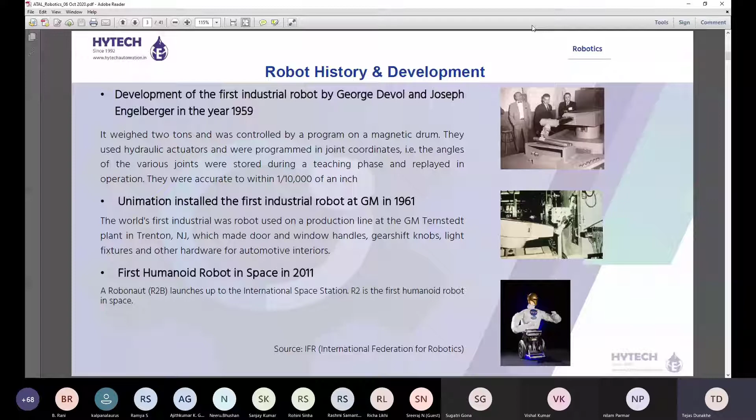In 1961, the first robot was installed in General Motors, and in 2011, the first humanoid robot actually went into space from NASA. So the industry is moving very fast, and in this next slide, I'm going to explain why robotics is important nowadays, why everyone is talking about this.

So there is a big concept, especially in the educational industry or even in the human resource industry, that robots are going to cut down the jobs of our people. India being a highly populous country, robots are something that we cannot afford because eventually people will lose jobs. So that has not been the case. If you see the statistics of China or US or any developing country for that matter,

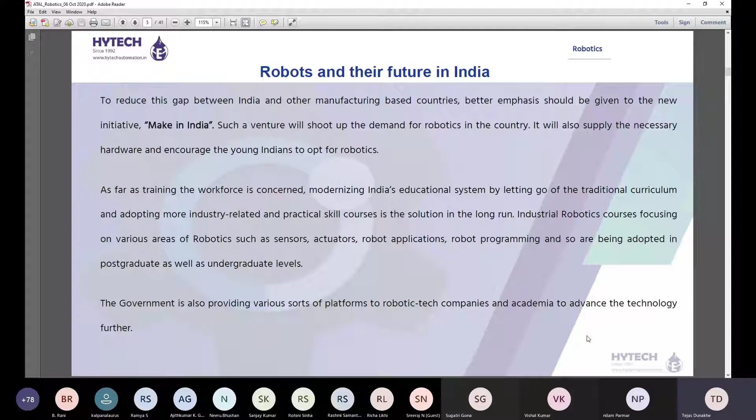We have a concept that a robot means a very big six-axis robot standing on a pedestal which can carry 400, 500 kg. It is not like that. Even for human movement, whatever we use, it can be termed as a robot. So moving on to the next subject that I want to cover is robot kinematics. What exactly is kinematics and why is it important? Kinematics is the study of the relationship between a robot's joint coordinates and its spatial layout.

Excuse me. Sir, you have told that for every 10,000 we have 3 robots. That means you are talking about the current situation of India? So this is the present situation, that this much robotics we are using in India. Yes. For every 10,000 employees, we are having 3 robots. Okay. Thank you, sir.

Yeah. So I'll share this presentation as well; the entire data is available there. The reason that we have so few robots is because the manpower is very high. The number of people working in India is much higher as compared to the UK or US. That's the reason this ratio has gone down substantially. Even China is not the best. China is, I guess, number 10 or number 13 right now. So that ratio has a lot to do with the population of the country as well. So moving into kinematics. Kinematics can yield very accurate...

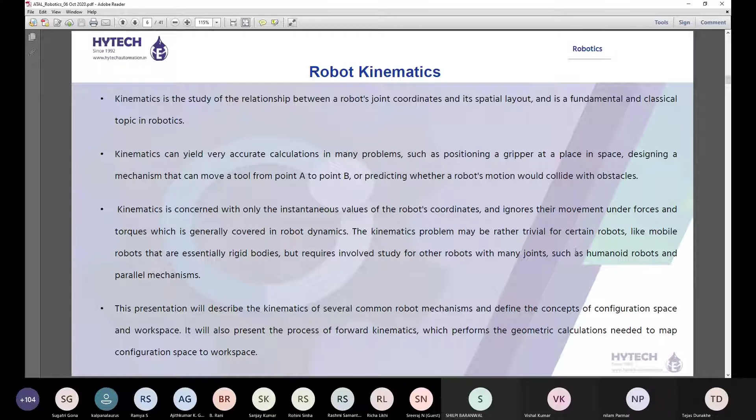Okay, I'll move ahead. So kinematics is the analytical study of the geometry of motion of a mechanism. Mechanism in the sense it is a robot; it can be any mechanism. So the analytical study of the geometry of the motion of that particular mechanism. This is with respect to a fixed reference coordinate system. So we have a fixed reference coordinate system, and with that we are going to analyze everything.

And again, as I mentioned, without regard to the forces or moments that cause the motion. So if it is driven by an electrical motor moving at some higher speed, the inertia, or m r omega squared as we call it, is not considered in kinematics. In order to control and program a robot, we must have knowledge of its spatial arrangement, where it is kept, how far the other objects are, where it has to reach, at what point it has to pick up the load. That means I define a robot with its payload capacity.

I say my robot has a 12 kg payload. That means it is able to lift 12 kg. But over its entire range of motion, it is not capable of lifting 12 kg. So depending on the spatial coordinates, the geometry, the kinematics, its payload capacity will keep on changing. That is where the study of kinematics comes into the picture. This sounds a little trivial, but every robot comes with software which will tell you at what point the payload capacity is, what your speed would be, and what your acceleration should be.

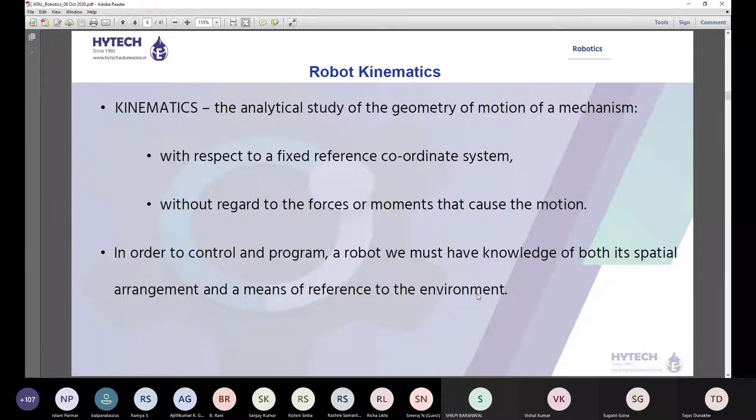So this is an open chain manipulator. Open chain in the sense... Sir, payload capacity is how much weight the robot can take. So the payload capacity of the robot depends upon the links and the joints. They are totally dependent, and it affects the speed also. If the robot has to handle heavy loads, then the speed will be low.

Yeah, generally, ma'am, this works in the reverse way. Robot manufacturers decide the speed of the robot, and they expect the user to operate at that speed. Once the speed is fixed, they'll calculate the total payload capacity. That means if my maximum speed is, say, 10 meters per second, then my entire robot will be designed with that particular speed in mind. So this is kind of a factor of safety. You are not going to run the robot at 10 meters per second all the time. You might run it at 5, but my design is based on that speed at that capacity. Yes, it's the maximum speed written. Yes, correct.

So this is the base. The mechanics of a manipulator can be represented as a kinematic chain of rigid bodies connected by revolute or prismatic joints. I guess you have gone through the different types of joints. Revolute is one which revolves. The second one is prismatic, which moves in a linear direction. At the end of the presentation I have explained how exactly this works when we go into the drives. In an open chain, one end of the chain is constrained to a base, while on the other end the end effector is mounted.

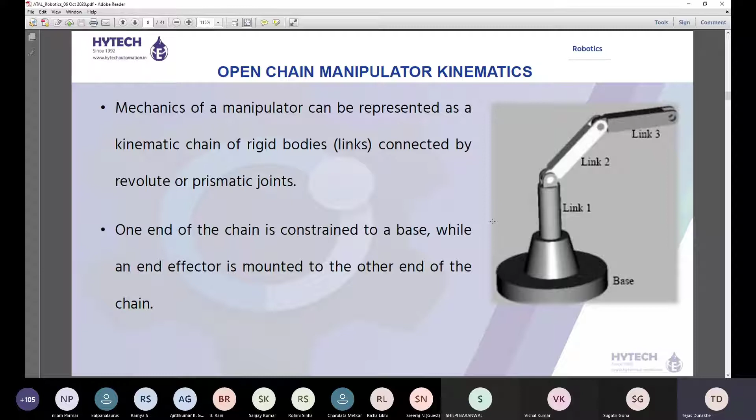Sir, excuse me, what is closed kinematic? I haven't got that. That means the other end of the chain is also fixed. If I move my J1, that is joint 1 of this closed chain, the end of the chain will not move freely because it is fixed to a particular position. If you see this, the end of my link 3 is free. So as I move my link 1, my link 3 will move very freely. Here in this case, it is not possible. Once I move my link 1, link 2 will manage in such a way that link 3 is fixed.

So in the closed figure, can you please go to the next slide? So in this figure, next slide, please. Yeah, this previous one. Okay. Sir, please next slide.

Excuse me, sir. Can we have the question session later? Because it breaks our concentration. Please continue the content delivery, and we can have the question answer session later. It's very difficult for us to focus again and again. Yeah. What I'll do is, ma'am, after 2:30 we'll keep the question answer session and we'll go back to any slide. Too many questions, and it's breaking our concentration. Ma'am, we can make a note of the slide number and come back after 2:30 and answer all the questions. We are not able to concentrate, sir.

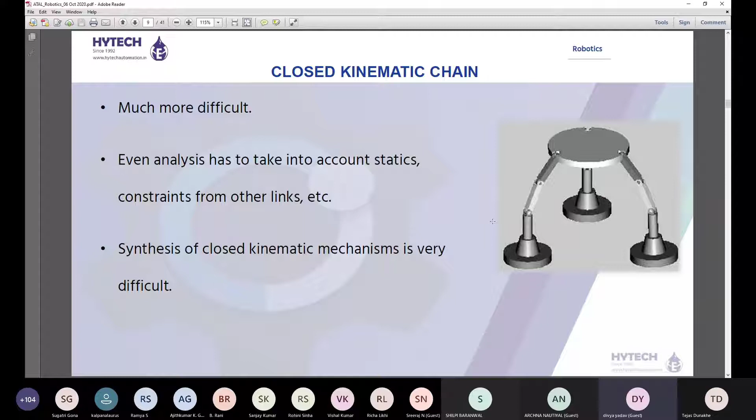So I'll move ahead. Here, if you see the basic concept of kinematics, if I move my joint 1, my end effector is going to move. At the same time, when you have 6 joints, movement of each joint is going to affect the position of my end effector. So in differential kinematics, the speed of the movement of the joints is going to affect my end effector. This speed, especially in robotics programming, matters a lot. If you want to achieve a particular position at a particular accuracy, differential kinematics plays a very important role.

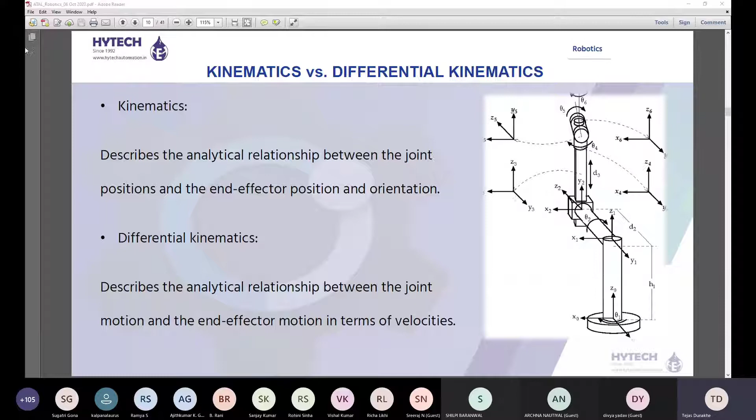I'm not going into the details of how to calculate everything, but this speed for every joint is different because in an articulated robot, my base axis will have the maximum capacity motor. That is my strongest axis. My J6 is going to be my weakest axis. If you see the construction, I'll show you a video, you'll immediately understand there is not enough space; there are a lot of constraints by which a manufacturer cannot put a high capacity motor there. So depending on my motor capacity and the reach of the robot, the speed of each joint is defined. I'll show you a selection criteria later in the presentation where you'll understand how to calculate that.

So when we say kinematics, that all depends on my frames. So robot is working in three-dimensional space. There is no fixed coordinate system. That means whenever I buy a robot, I get a robot with a CG, center of gravity.

There are different types of coordinate system. One is the world coordinate system. That means if you want to, you can define your workspace, say 3 meters by 3 meters. Depending on that, you can define your WCF. RCF, robot coordinate system, comes with robot. That is where the CG of the robot lies.

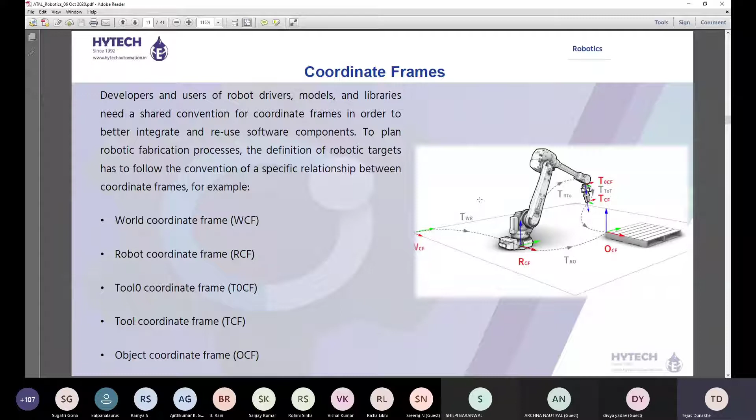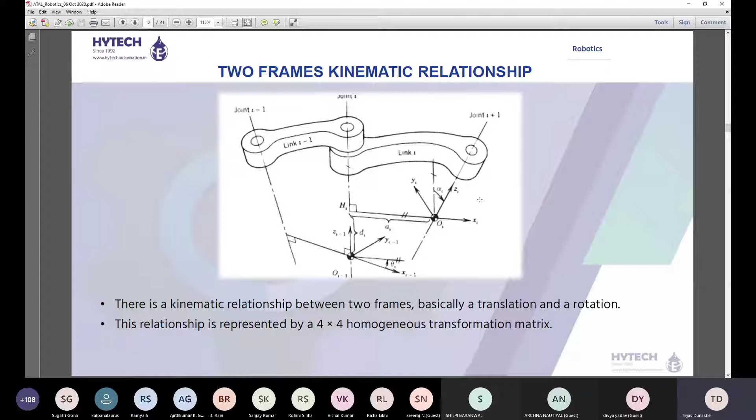Any coordinate frames, that means all these coordinate frames are related to each other because they are going to move in the same way. Only thing, my reference point is going to change. So with kinematics, you can relate each frame to another. There is again a calculation with the 4x4 matrix. You can carry out the entire calculation to find out the coordinates.

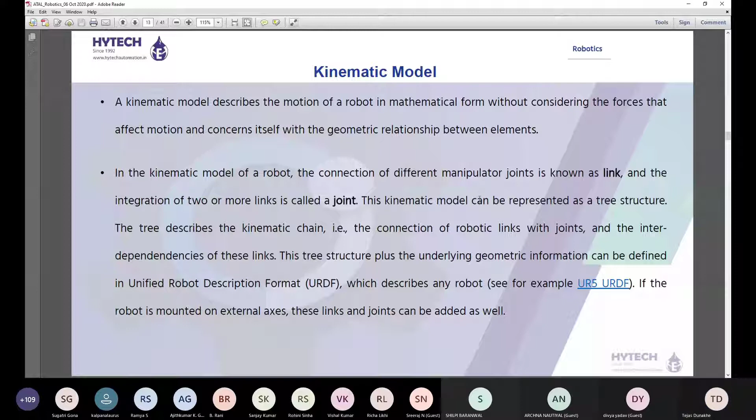So we move into the kinematic model. So a kinematic model describes the motion of a robot in mathematical form without considering the forces, external forces. In the kinematic model of a robot, the connection of different manipulator joints is known as link. And where 2 or more links connect, it is called as a joint. This kinematic model can be represented as a tree structure. The tree is nothing but a kinematic chain. So I'll move into that.

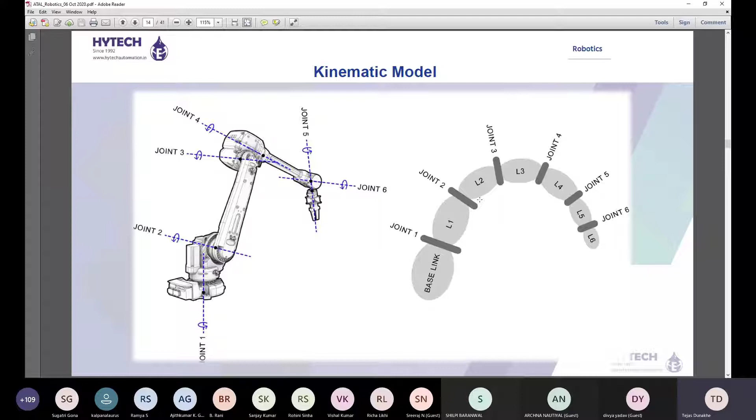You take any manufacturer, this is going to be the most commonly used robot. If you have a specific application, you can manufacture anything you want. But generally in the industry, any of the automobile companies, you will find this kind of a robot there. For welding, for handling, for pick and place, most of the robots are like this only.

So robot links. Robot links are solid mechanical elements. Depending on the kinematic model, movement of certain input links allows the output links to move at various positions.

Robot joints. The joints are the elements in the robot which help the links to travel in different kinds of movements. So there are 3 types of joints which you have already been through. The revolute, which rotates, the prismatic, a sliding joint, then fixed. Generally, the base of a robot is fixed. So that is a fixed joint.

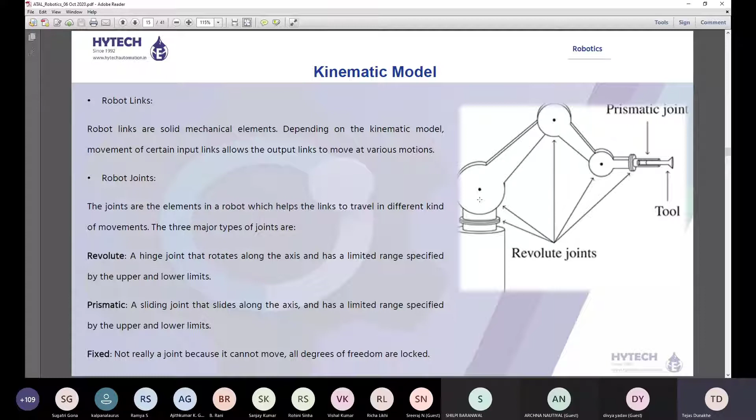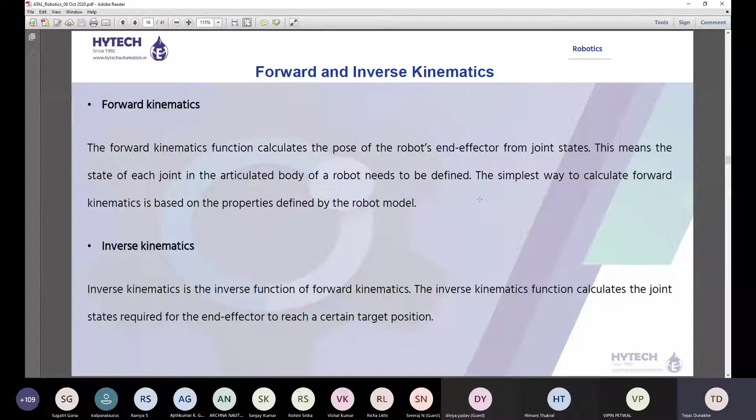So the inverse kinematics is the inverse function of forward kinematics. The inverse kinematics function calculates the joint states required for the end effector to achieve a particular position. We go in the reverse direction. Yes. Sure, to give you an idea, in forward kinematics, you move J1, J2, J3, and calculate where your end effector will reach. In inverse kinematics, you have to move from A to B. So how are we going to move all your 6 axes? We are focusing mainly on the articulated robot with all 6 joints.

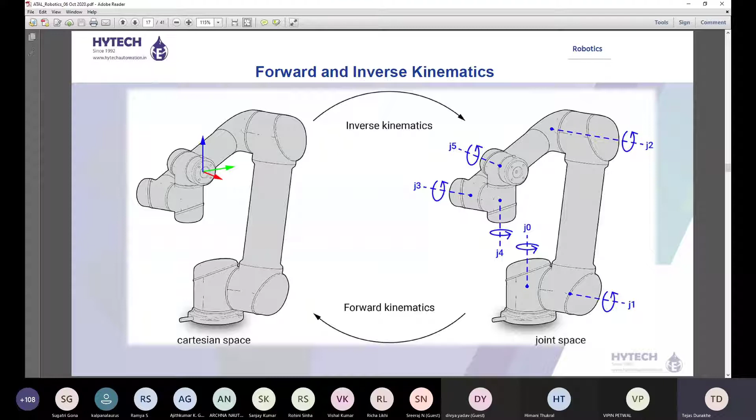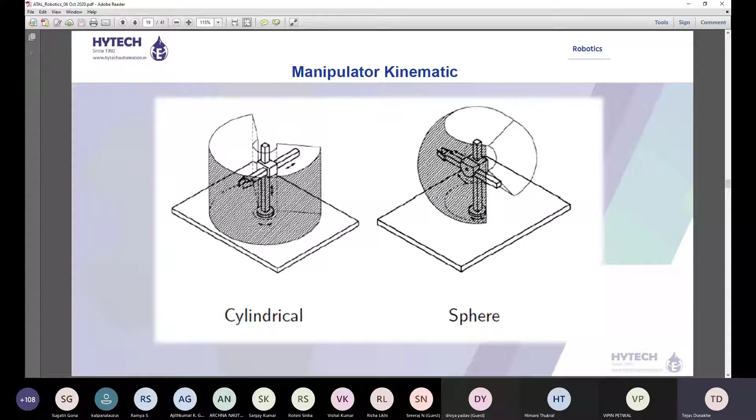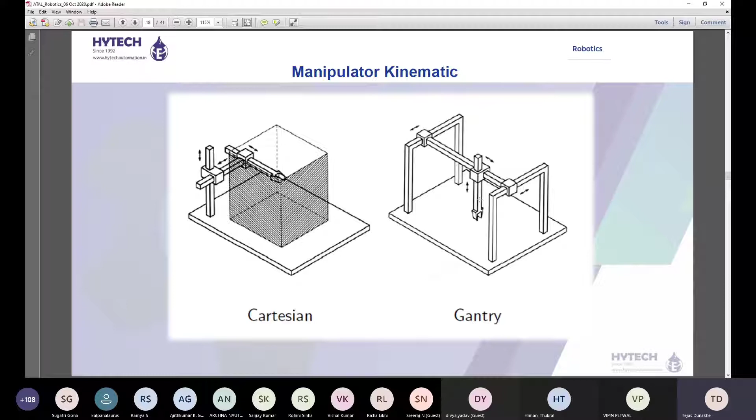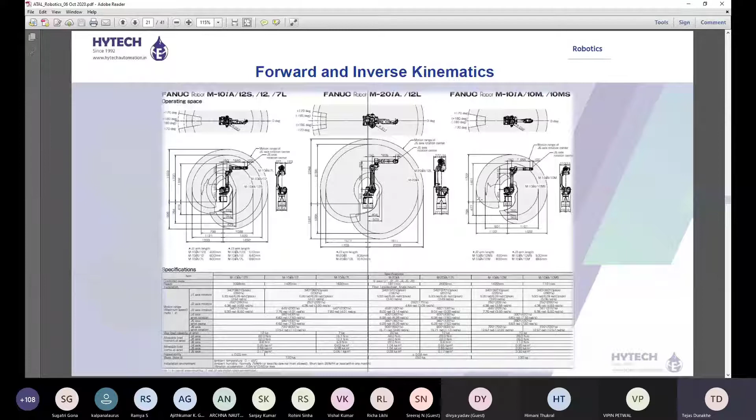So depending on your requirement, there are a lot of softwares through which, if you have to pick up a job from 1000 mm, which is 1000 millimeters away, you can put all these conditions in a software and it will tell you which robot to select. So this is how any industrial robot selection looks like. They give you the reach, they give you the payload, and then with the kinematics, you have to find out what kind of robot you want.

So this is an articulated robot, most commonly used. I guess I had an earlier question that in an articulated robot there can be a prismatic movement as well. There can be, but this is what you will mostly see in industry. The red colored motors which you see are the servo motors, which are connected for each and every joint. When you have a motor, generally 90% of the times it is a rotary motion.

Here the end position is achieved by moving J1, J2, J3, J4, J5, J6 in a rotary movement. So this is what is used in most of the industries, paint shop, spray shop, anywhere. This is the most commonly used robot.

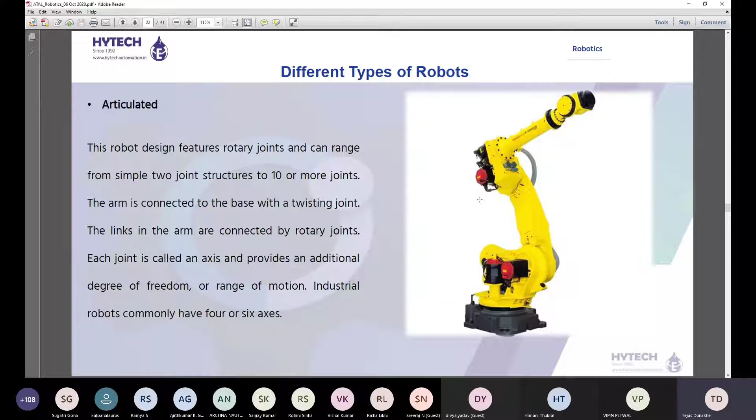This is a Cartesian robot. This is generally manufactured depending on a specific requirement. That means there is no mass production of this. If I have a factory, if I have a particular application for which I need to design something, then yes, this can be done. But if my articulated robot volume is 99%, Cartesian robot would be 0.1%. That is the density of these robots.

Then this is a cylindrical robot. A cylindrical robot is nothing but a Cartesian robot with base as a rotary axis. So it can cover 360 degrees, a Cartesian robot which can cover 360 degrees motion. A polar robot which generally has one or two axes with a rotary motion. Again, very, very rarely used.

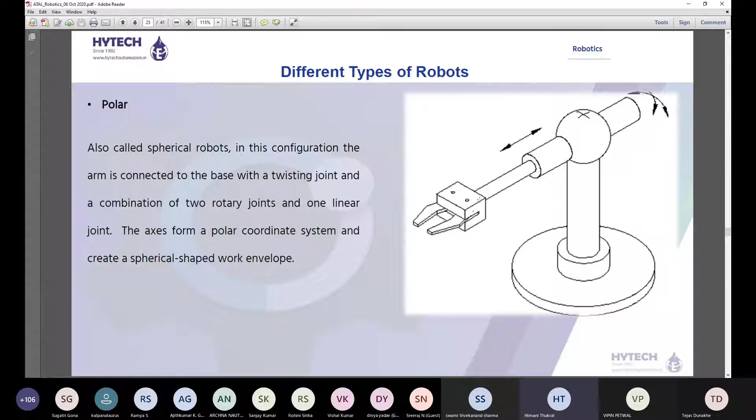Excuse me, sir. Yeah. Sir, I'm not able to see anything on the screen. Is it my problem? Right now I'm able to see. Yes, sir. Thank you. Sir, can you please show that Cartesian robot once again? Yeah, thank you. So I'm going to show you the video as well.

Since we are going back to this slide, I'll tell you, in this Cartesian robot there is no interpolated movement most of the times. That means it has got mostly 3 or 4 axes and one axis will move at a time. This is generally programmed like x-axis 10 mm, y-axis 5 mm, z-axis 15 mm. So it will keep on following this routine. Whereas in an articulated robot, you have point A to point B, where all 6 axes will move at a time. I'll show you a video of this. It will give you a very clear picture.

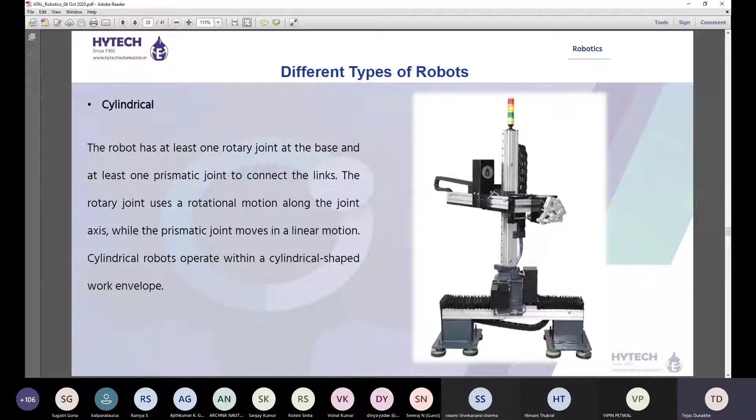This is one of the latest robots. We had used this. The speed of this is unreal. It can work almost 20 times faster than any articulated robot. This is for IC or most of the packaging industries where you have to fill up anything that you see packaged. Most of the times in developed countries, this is the robot that they are using.

The speed of application is almost 30 meters per second. At a very, very high speed, it can work. Again, a very, very expensive robot, hardly being used in India, but in the US or in Japan, this is most commonly used. This is not a type of robot.

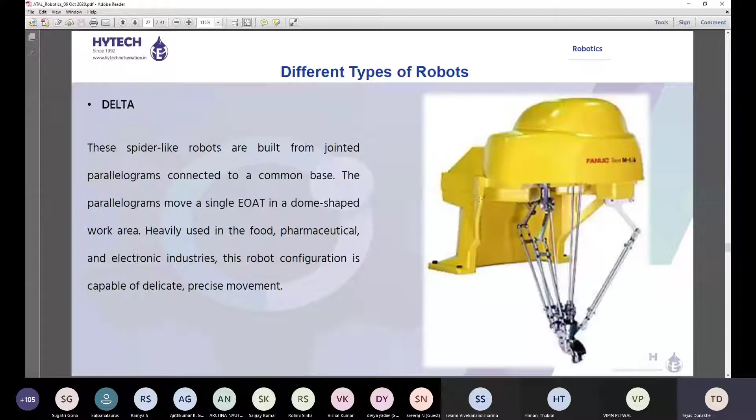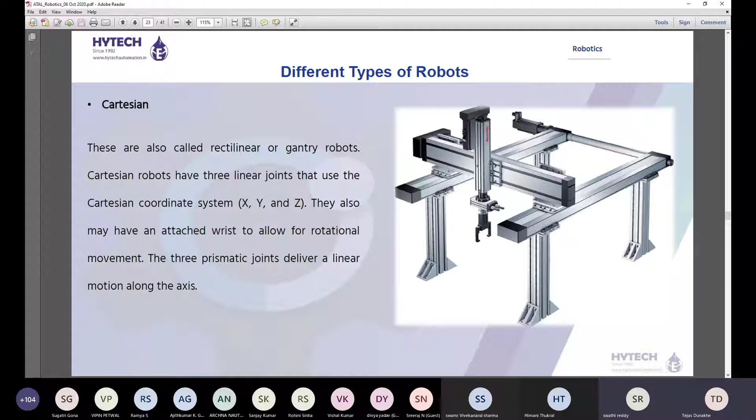Excuse me, sir. Sorry to disturb you. In Cartesian, can you just give me an example of what use it is? Everything else you have given examples, but where exactly are we using Cartesian? What type of work do we do with it? Ma'am, I'll show you a video of that. Just allow me 2 to 3 minutes. I'm going to show you a video of a Cartesian robot. All right, thank you.

So this is not a type of robot, first of all. Collaborative robots are now coming into the picture big time. There is one company from Denmark, and they have very nicely developed this robot. These robots are again articulated robots, but they work in collaboration with humans. That means the speed of this robot is very less and their moment of inertia is very less. If the robot just collides with a human, there is not going to be any injury to the human. So that is the advantage of this.

A lot of industries in India are preferring this robot because their efficiency is less, their speed is less, but yes, their cost is also less. So this is where industry is moving in a very fast way. Most of the articulated robots are now also coming up as collaborative robots. Generally any articulated robot will weigh somewhere around 140 to 150 kg. It moves at 20 meters per second. If it collides with you, it is going to cause a lot of damage, very serious injuries to human beings.

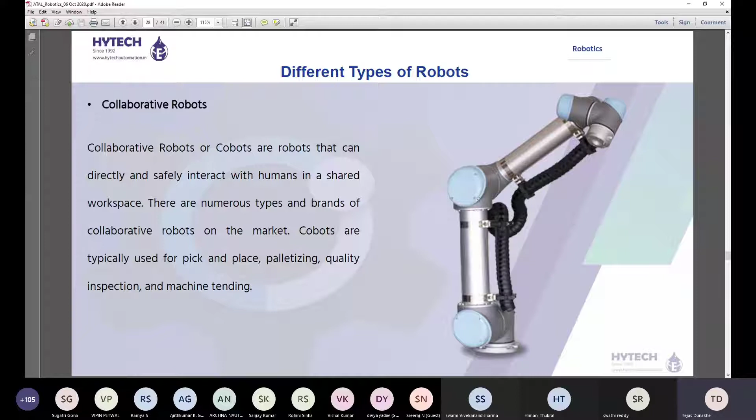This robot is exactly the reverse. It has got sensors, torque sensors, overload sensors. As soon as it comes in touch with humans, it will stop immediately. So a collaborative robot can be anything. It can be SCARA, it can be Cartesian, it can be articulated. This is just a type of robot, not a structure of a robot. So what I'll do is I'll show you a few videos which will give you a very clear idea.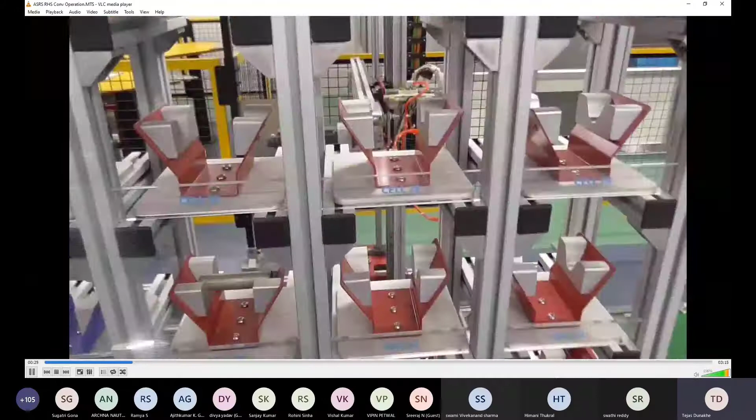What you see is actually a specifically designed Cartesian robot. It is used for pick and place application. Looks-wise it can be different, but it has got three axes, X, Y, and Z. You have to program them in a way that it will just obey your instructions. This is particularly used for pick and place. This is an automatic storage and retrieval application. That means the job will be kept onto something, picked up by a robot, manufactured, and it will again come back to this unit.

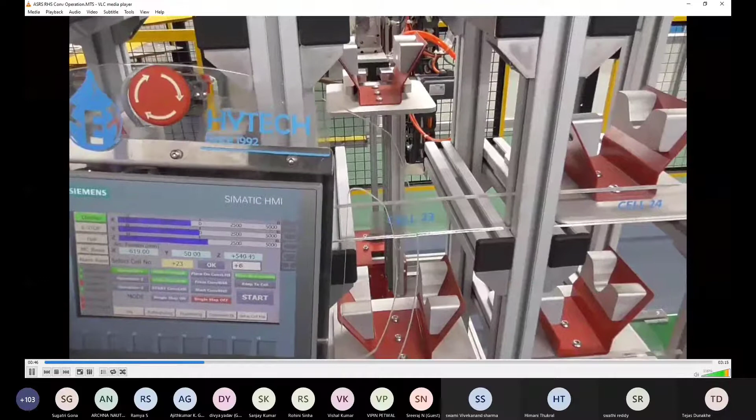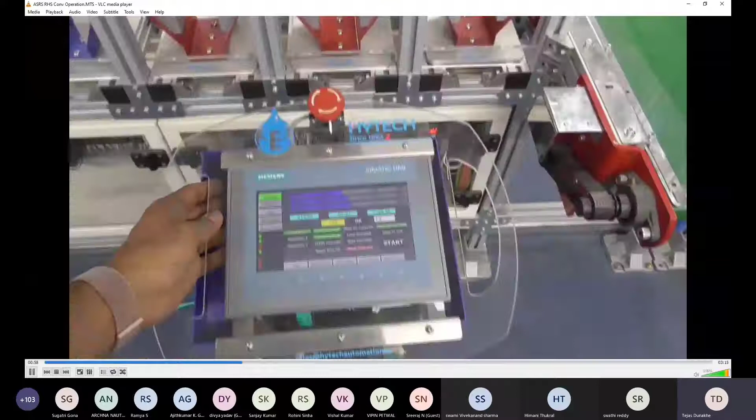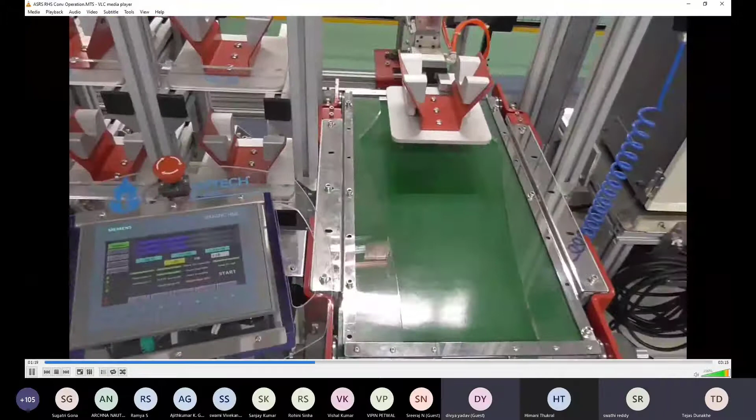You can see the axes moving, the X, Y, Z coordinates are moving. No, sir, I can't see the video. Can anyone see the video? Is that visible? Yes, sir, it's very clear. It is visible.

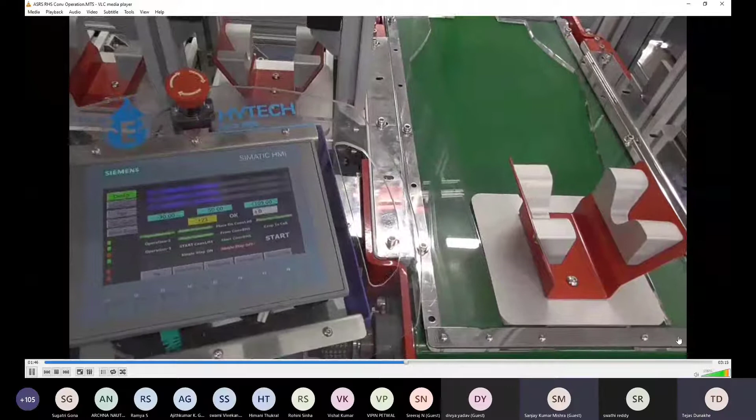So this is the process. The Cartesian robot has done its job. In the Cartesian, as I said, you can have a base axis as a rotary axis. There's some background noise. So this is a specifically designed application depending on a particular customer's requirement or an industrial requirement.

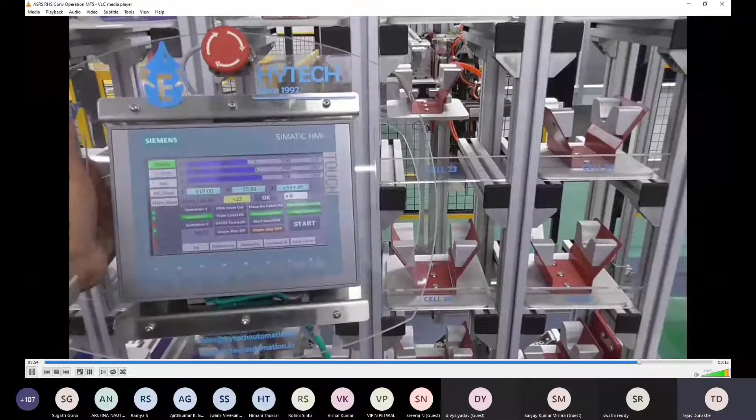So now this is called the y-axis. It is moving in one direction. Generally in Cartesian, people will avoid interpolated motion. Each axis will move at a time. That avoids the kinematics as well as the inverse kinematics calculations, and there is no issue of accidents as well. So I'll stop this and go to the next video.

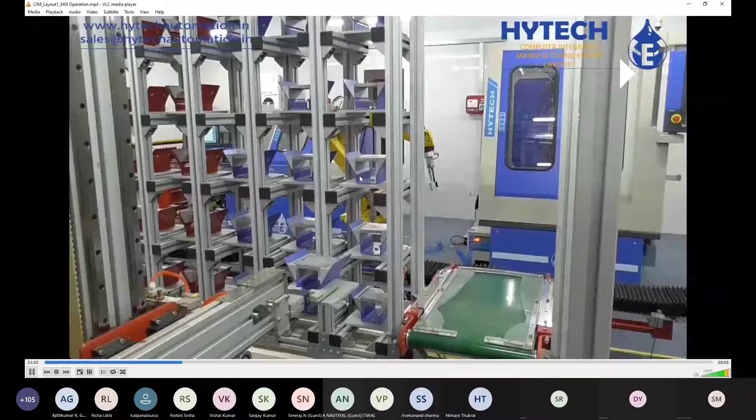I'll just show you one application of an articulated robot. Just a minute. You can see the next video now. Yes, sir, we are able to see. Sir, the video is not visible to me. There might be some lag in the video sharing, I guess. You'll have to wait for a minute, it might start.

So the robot which is moving right now is an articulated robot. This is the standard structure of any articulated robot. There are 6 joints. The one at the end which is going to lift the job is called the end effector or the end actuator. It is visible.

So this is where the payload matters. Now, if you see, the robot is at its stretch. So this particular robot can lift 12 kg, but at this position, it is not going to lift more than 8 kgs.

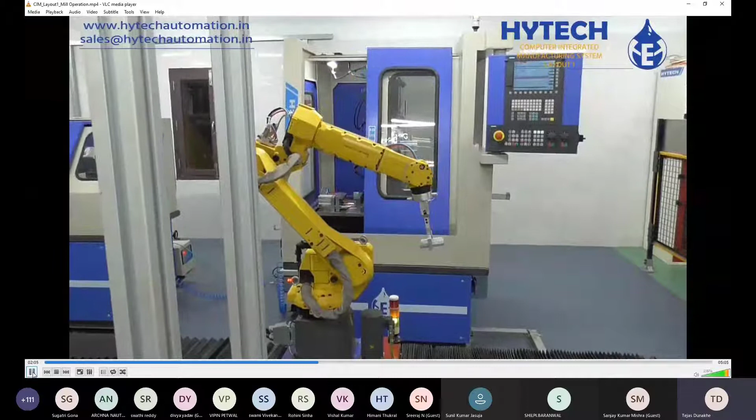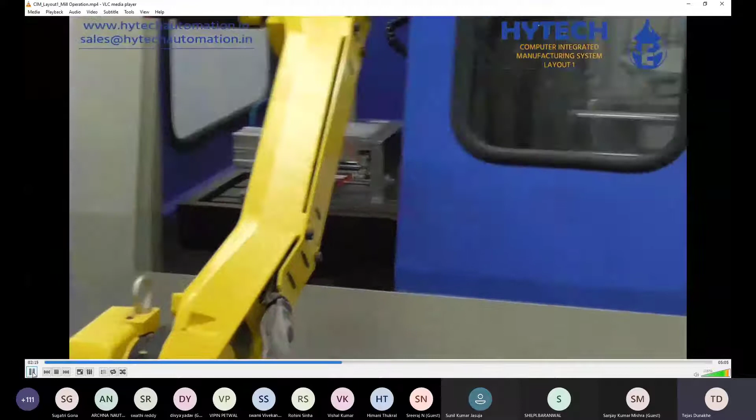So a robot generally works in tandem with other machines, other RTUs. RTUs are remote terminal units. Anything that performs its work remotely is called an RTU. So generally, they work in collaboration with other machines. So this is a CNC milling machine. You can integrate their signals together. That means it will wait till the door is opened. Once it gets the signal, it will proceed. So with that integration, nowadays robots are so advanced that there is very, very little chance of accidents.

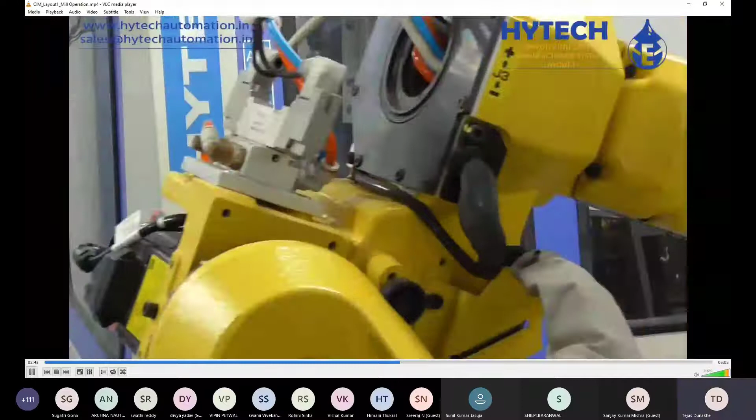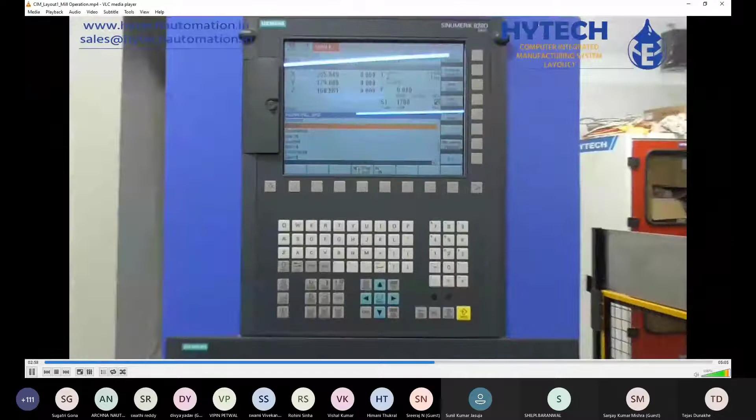So now the robot is moving on a linear axis that is called the 7th axis of a robot. Most of the 6-axis articulated robots come with an option of a 7th axis, which can be integrated. That movement is a prismatic movement. All these 6 joints are revolute joints. The 7th joint, which is moving right now, is prismatic.

So the entire movement is in joints. There is only revolute movement, and you are achieving the position that you want to achieve. That means you can have the movement of your end effector from point A to point B achieved in a linear movement, but all joints are having a revolute movement.

Excuse me, sir. Yes. Sir, is this the kinematic motion that the robot is moving in? Yeah, kinematics, inverse kinematics and forward kinematics are actually the back-end calculations for the robot movement that you want to achieve. Okay.

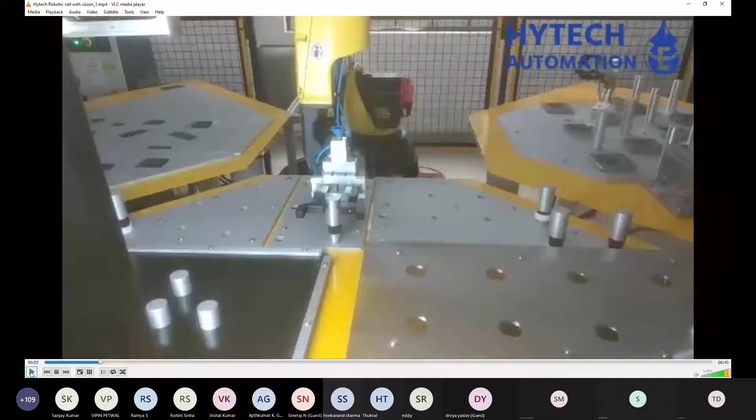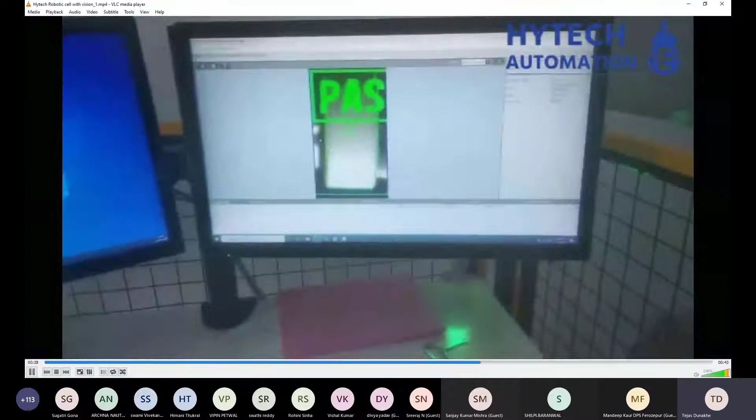This is a small video. This is an assembly application generally used for piston ring assemblies and everything. So here the robot is assembling a gasket onto a job. Now you want to check whether it is assembled properly or not. So you go there, and you'll see a very quick flash. You see a picture, and with 100 microns accuracy, you can find out whether it is properly assembled or not.

So the video is stopped. Now it has resumed. There is a lag, I guess. We'll have to have patience because there is a lag. If you want, I'll replay this video. It's a very short video.

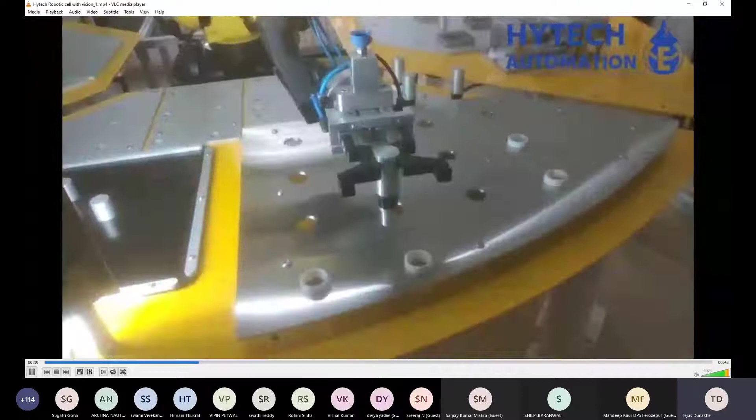So these are very advanced functions that nowadays robots can do, and with the technology of IIoT or Industry 4.0, as we call it, all these parameters can be immediately transferred to the cloud. Through the cloud, you can see on your mobile as well which parts are accepted or rejected.

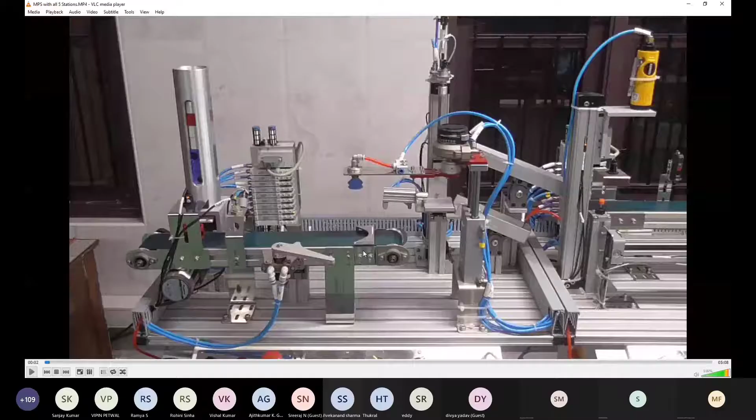So now I'll just show you one video of SCARA, then we'll move ahead with the drive systems. So this is a prototype of a packaging application. All these things that you see are actually robots, pneumatic driven robots, single axis, two axis. It's a collaboration of cylindrical as well as Cartesian robots working on pneumatic drives. Anything that operates automatically can be termed a robot.

These are height sensing applications. Again, a robotic application: you want to find out whether the height is properly managed or not. The one which you see right now is a SCARA robot. We'll see the operation as well. The entire system which you see right now is operated on pneumatics. So when we move into the drive mechanisms, you can relate to this. This is a pneumatically driven robot.

Sir, what is the meaning of pneumatics? Anything that works on air. Pressurized air. Everything here is working on pressurized air circulation. Okay, thank you.

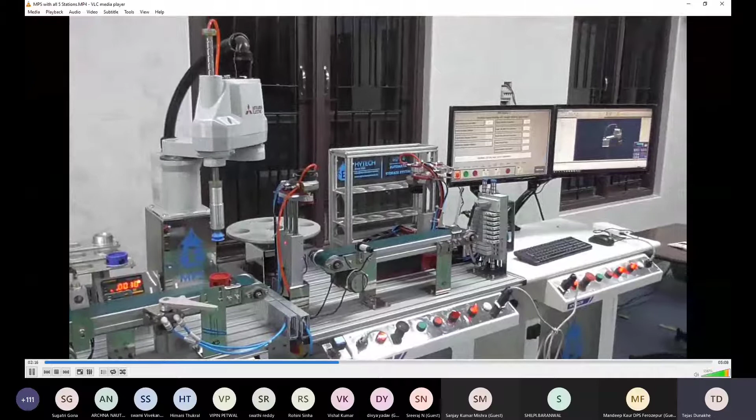Sir, can you give one example of where these types of robots are used? SCARA robots? Yes, sir. Mostly pick and place applications like these, ma'am. Mostly only pick and place applications, but the reach of SCARA robots cannot be more than 600 mm. That means from point A to point B cannot be more than 600 mm, whereas in articulated robots you can have it up to 5 meters, 6 meters as well. Okay, thank you, sir.

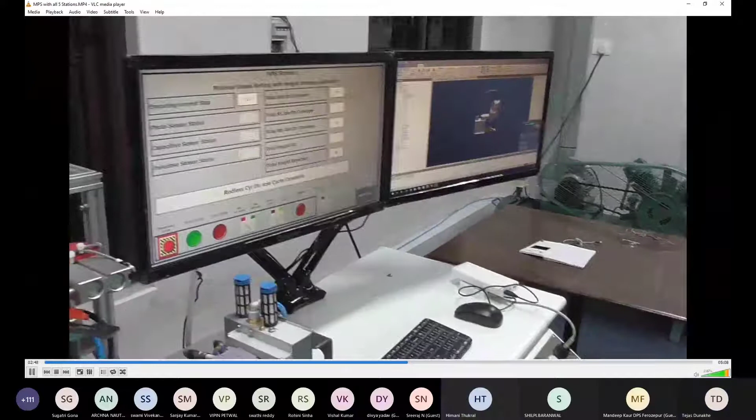So here also what you see, the slide here is generally termed as, I'll show you, it is not moving right now.

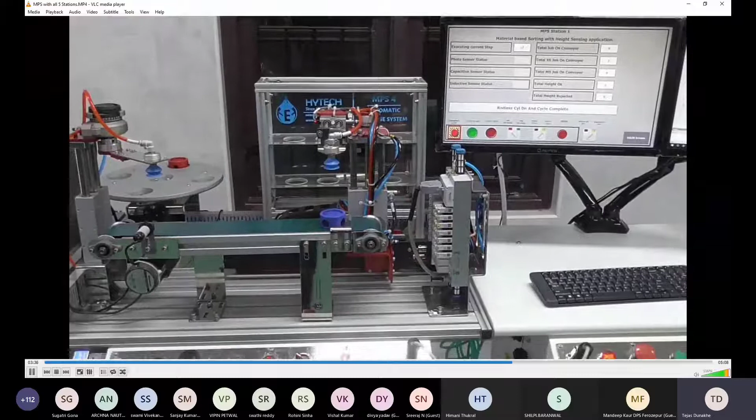So yeah, the slide is moving, but it is moving on electrical motors. It is moving with stepper motors with a prismatic joint. This is also called a single axis robot. Generally in industry we call it a KK robot, one of the most popularly used slides. There are n number of applications where these slides are being used. Even in CNC machines these slides are being used.

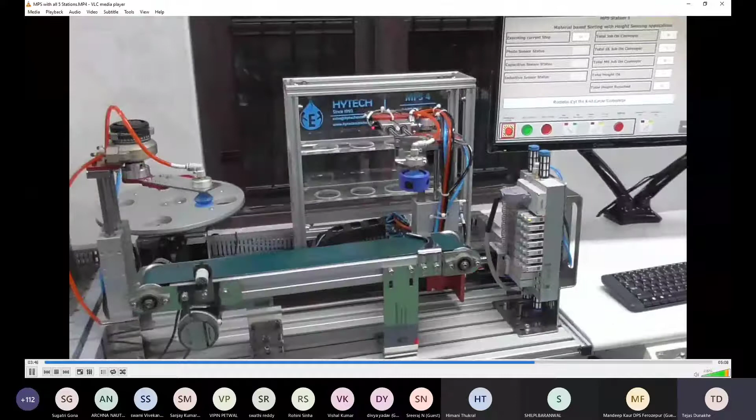They're highly accurate. You can achieve an accuracy of 5 microns. 1 micron is a 1000th part of a mm. So this is how you achieve the accuracy. With pneumatics, achieving accuracy beyond 1 mm is very difficult. That is where you have to move to either hydraulics or electrical drives.

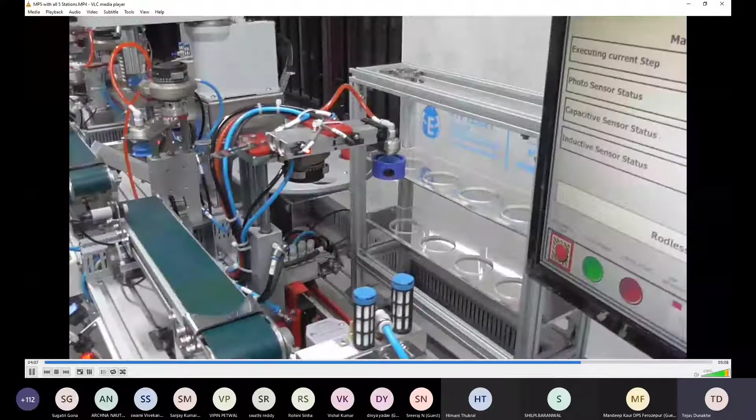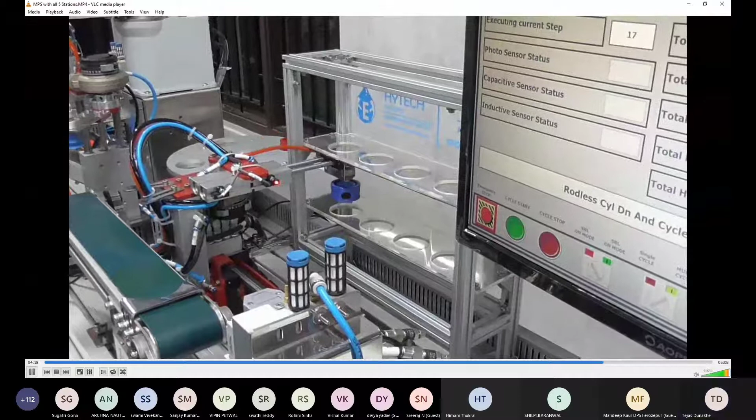So I'll move back to the presentation now. You have seen the videos of Cartesian, articulated, as well as SCARA robots.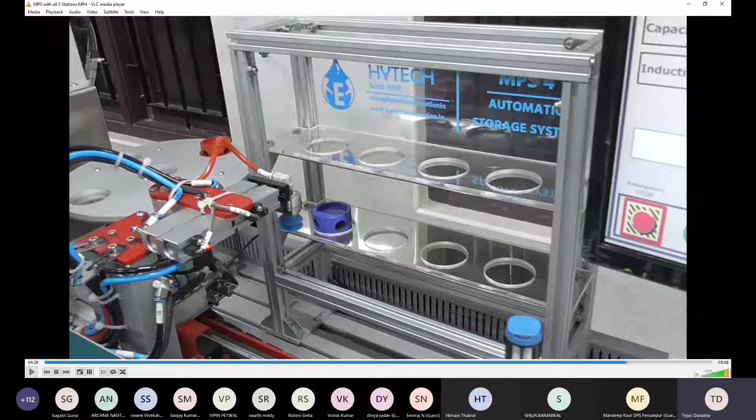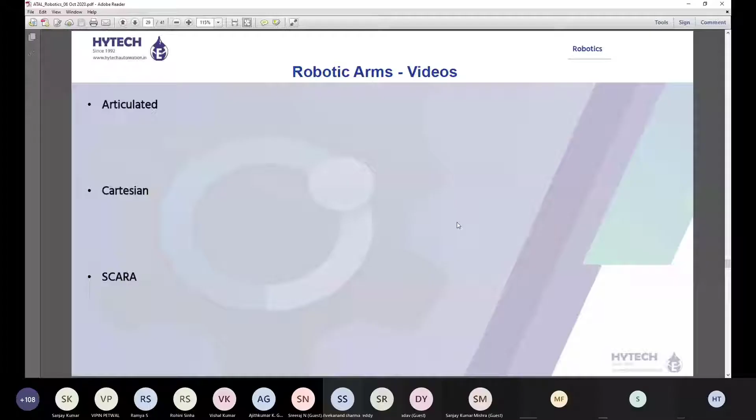So now we move on to the drive systems. What exactly is meant by a drive system? Anything that drives, because we are talking about movement of each axis of a robot. For movement, we have to drive it. So how do we drive it? There can be an electrical drive system, a hydraulic drive system, or a pneumatic drive system. In the next slides, we'll go into the details of each drive system.

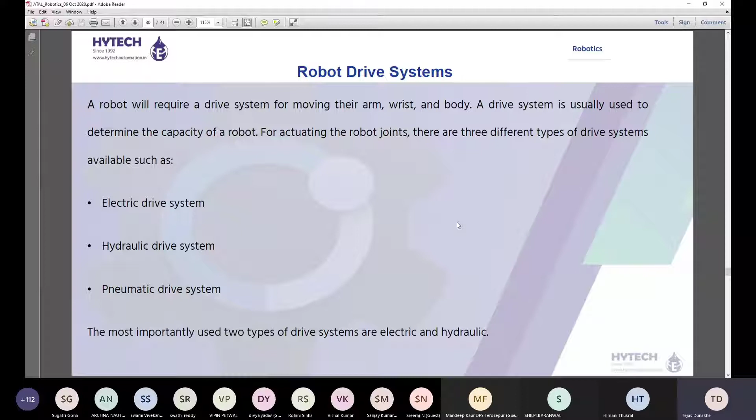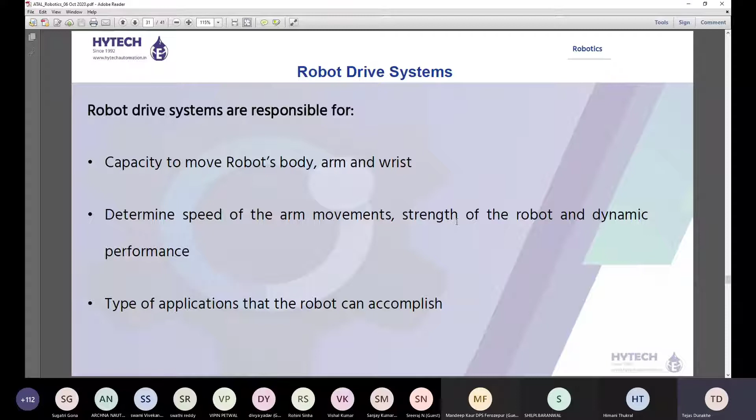So why is this drive system important? It is required to move the links as well as the joints of a robot, and it determines the speeds of the arm movements, the strength of each robot, as well as the performance. Performance in the sense of what kind of accuracy you can achieve with that particular drive. Then again, the type of applications the robot can accomplish. There are different types of actuators: hydraulics, pneumatics, electrical.

Just to clarify, hydraulics is something that is done with oil. Oil is incompressible; it cannot be compressed. Generally when we work with oil, we work at around 70, 80, 90 bar of pressure. Pneumatics is never a reliable system. Only if you want a movement from A to B, with no intermediate position, can you use pneumatics. But pneumatics comes with a lot of problems. Yes, it is sophisticated, but it comes with a lot of problems because it is compressible.

That means if you have a cylinder working at 5 bar and you push it with your hands, it might go inside. That is the thing with pneumatics. With hydraulics at 70 bar, nothing can happen. Then comes the third part, electrical, which is the most commonly used as well as the most popular drive system. In electrical, you have servo motors, stepper motors, as well as direct drive motors.

Servo motors are in any of the industrial robots. I'm not very sure how well we know stepper motors or servo motors. I don't want to go into the details, I'll just give you a layman's explanation. For stepper motors, there is no feedback. That means if I tell someone to do something and it doesn't do it, I don't have any control over it. Servo motors come with feedback. That means I tell someone to do something and then I check whether he has done it or not. If he has not done it, I'll tell him again. That is what servo motors do.

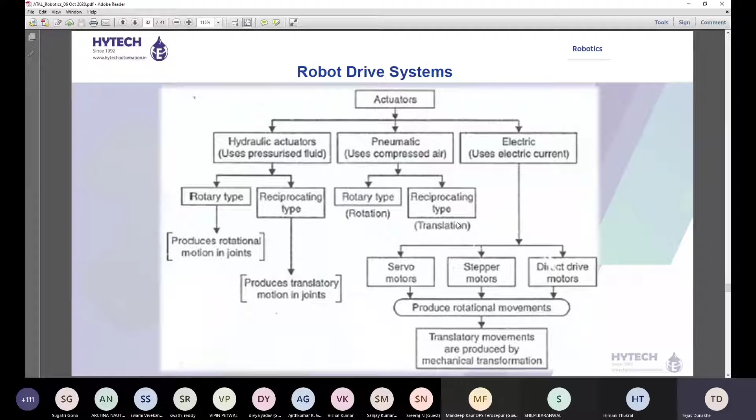In any industrial application, 90% of the time where you want accuracy, people prefer servo motors. Stepper technology is nowadays obsolete, and I don't think after 10 years we'll be seeing any stepper motors or direct drive motors. Servo is where the industry is moving. Most robot makers like KUKA, Fanuc, ABB, the giant companies manufacturing robots, are using only servo motors.

So we'll go into the details of the hydraulic drive system. Generally, hydraulics is used where the payload capacity is very high. When you see a crane on the roads, it is being operated on hydraulics. That is the only thing you can do. With servos or with pneumatics, you cannot do it. Pneumatics is impossible. With servos, the cost becomes very high.

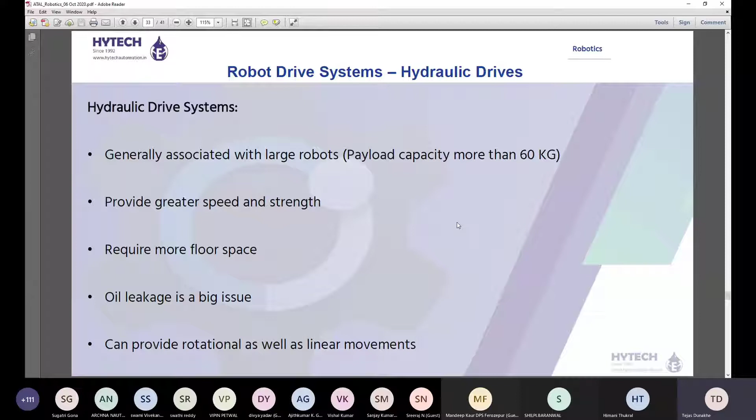With hydraulics, you can have a huge speed, tremendous speed as compared to servos. But the downside of it is oil leakage is a big problem, and sometimes the oil can be inflammable as well. It requires more floor space. So those are the downsides of a hydraulic system.

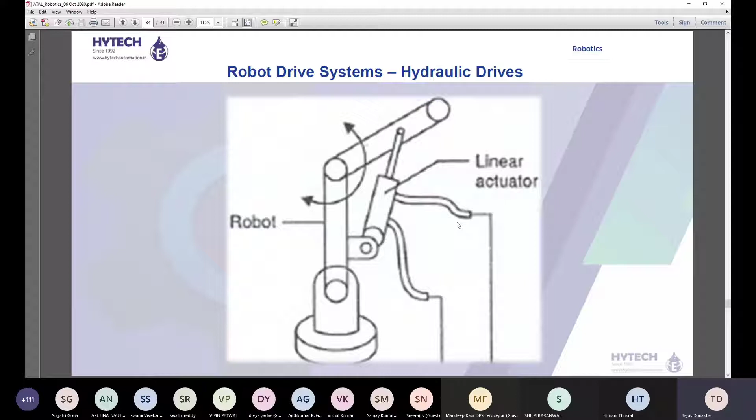So what you see here, where we have mentioned as linear actuator, although it is a linear actuator with a clevis joint, it is providing a rotary movement. The two cables kind of thing which are coming out are for the inflow and outflow of oil. That means oil flows at the top, then oil from the bottom will come out. It is P to T. I'll not go into the details, but this is how a hydraulic system works. For that, you need a servo valve.

Don't get confused between servo motor and a servo valve. Servo valve is something which achieves the accuracy for oil flow. And this is the oil circuit from which you send a pressurized oil into the valve, then into the cylinder. At the same time, the oil which is coming out from the other end flows into the reservoir.

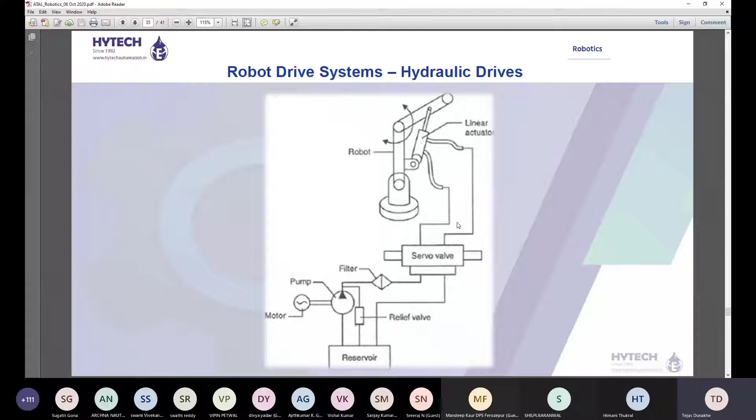Then pneumatic drive systems. You have already seen a pneumatic application in that video. That entire system was working on pneumatics. Most of the bottling plants, like we drink Coke or Pepsi, they are being operated on pneumatics because there is no payload capacity as such. Most of the bottling plants and packaging industries are using pneumatics as their drive system. Very small, sophisticated. There is very less danger of accidents happening because even if there is huge leakage, what will happen? Just air will flow into the air. So there is no big issue with that.

Generally, the pressure at which pneumatic systems operate, in most of the cases, is less than 10 bars, which is not dangerous for human beings. The biggest issue with this is chances of drifting under load as air is compressible. That means if there is any external load which has been applied intentionally or unintentionally, it might damage the entire workflow. That is the biggest issue with pneumatics.

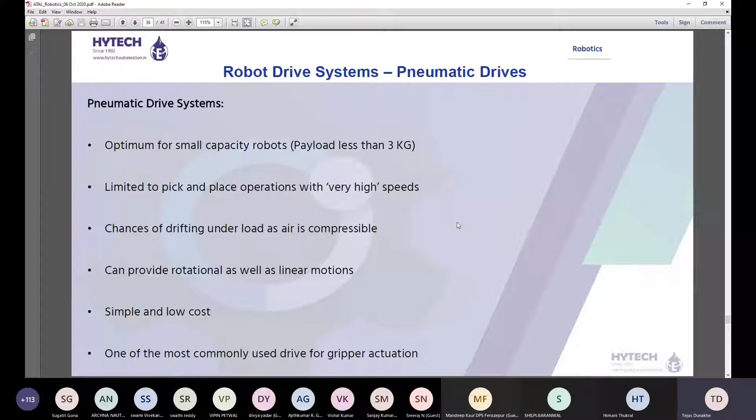Pneumatics is one of the lowest cost mechanisms. So generally, this is the first step in any industrial automation. People start with pneumatics, then to hydraulics, then to electricals. We have already seen this.

Electrical drive systems. This is one of the most popular and, by volume, one of the most installed drive mechanisms. Any CNC machine, any robots, any gantries are nowadays operated by electrical driving systems, which are readily available. The technology is well absorbed, at least in our country, and it can be very well serviced as well. It is well suited for rotational as well as linear joints.

You have a lot of mechanisms like ball screws or lead screws or rack and pinions through which you can transfer the rotary motion into a linear motion. So that is also very proven. For small robots and precise applications, there is no other way than electrical drive systems. You can achieve highest accuracy with electricals.

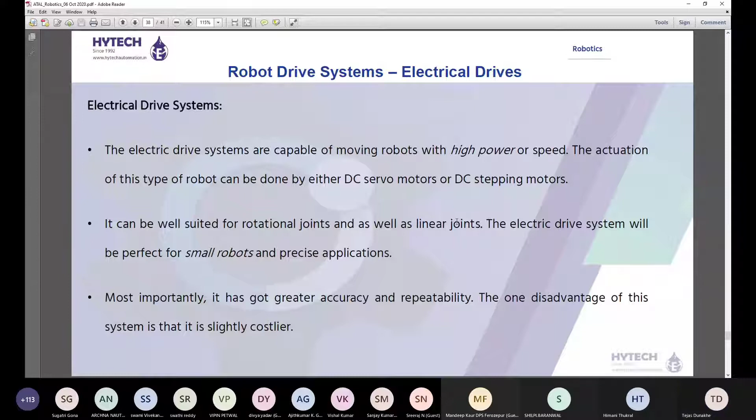As I said, it's a feedback loop. If my motor has overshot by say 10 microns, this encoder will give a feedback to my controller, and that motor will be brought back by 10 microns. So that is the entire feedback loop.

Yeah, so this actually concludes my presentation. So it seems that there are a lot of questions. So we'll open for a question answer session. If you have noted down the slide number, you tell me so I can go back to the slide.

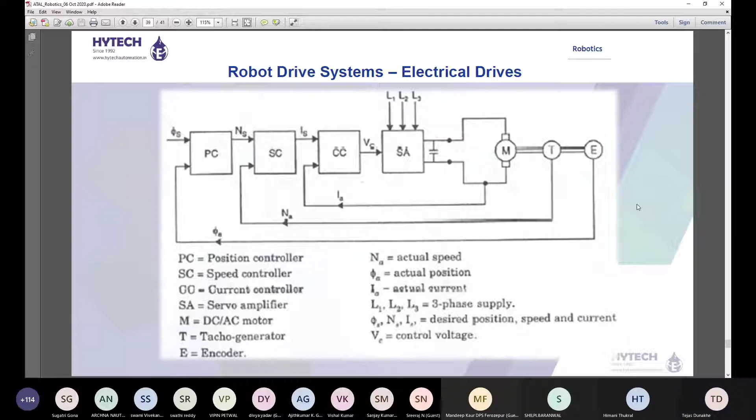So the robotic surgery, which kind of robots are used there in the field of medicine? That is actually a research topic. I have never had a privilege of working with surgery, so I can't tell you that. I'm not very sure what exactly they're using robotics for. But most of the automatic machines as well nowadays, they call them robots. So I'm not very sure about that.

And the ventilators where they are used, are they robots? I don't think so, it's a machine. A ventilator should be termed as a machine because it's an equipment. Okay. Thank you, sir.

Any questions? Just one question, sir. If I have to explain kinematics, I can say it's the classification of robots based on their movement, how they are moving. Based on that, we are classifying the robots. Is that what kinematics is? Ma'am, kinematics is actually the movement of joints of a robot to achieve a particular position. Okay, so all these types of robots that you said, articulated, Cartesian, etc. So basically, it is about their movements only, no?

Exactly. So my Cartesian robot will have a different movement structure to achieve point A from point B. My articulated robot will have a different movement structure. As I said, you can achieve linear motion of your tool. Tool is the end effector. You can make that tool move in a linear way, in a line movement, by having a rotational movement of all 6 axes. That is your kinematics. How you want to do it.

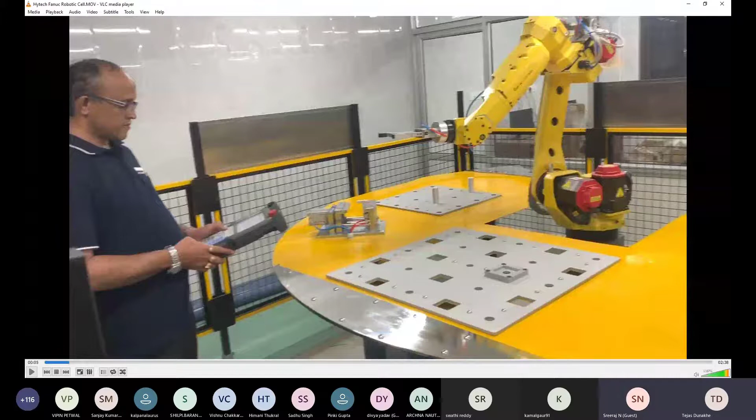I'll just go back. Can you see the video now? Yes, sir. I'll pause it. You see the person holding that particular thing in his hand. It is called a teach pendant. It has an 8-inch screen HMI, but you can design that HMI the way you want it. If you want to have a particular set of operations mentioned, then you can have it. But this is all you will get with a robot, and this is more than sufficient to carry out the entire scope of applications of a robot.

Okay, so the robot is not meant to do only one particular task. Say for example it is capable of some 10 tasks. If this one robot is capable of doing them, according to our requirement we can program any of those 10. Yes, correct. In the coordinates.

So the first time he will set up the positions manually, and when it is all set up, you can just save it. So from the next time it starts working on its own. Yes, very correct. This is called teaching. They teach it for the first time and it will keep doing the same thing with an accuracy designed by the manufacturer.

I had a question previously about how a controller looks. The one at the bottom of the screen right now is a controller. It is as simple as that, but inside it is very complex. And one more question I had received was about the coordinate system. If you see the aluminum plates in silver color, I'll have a coordinate system for each plate. That way it becomes very easy for me to program it. I cannot have a world coordinate system for all the jobs here. I can have a coordinate system for each plate. So that becomes very easy.